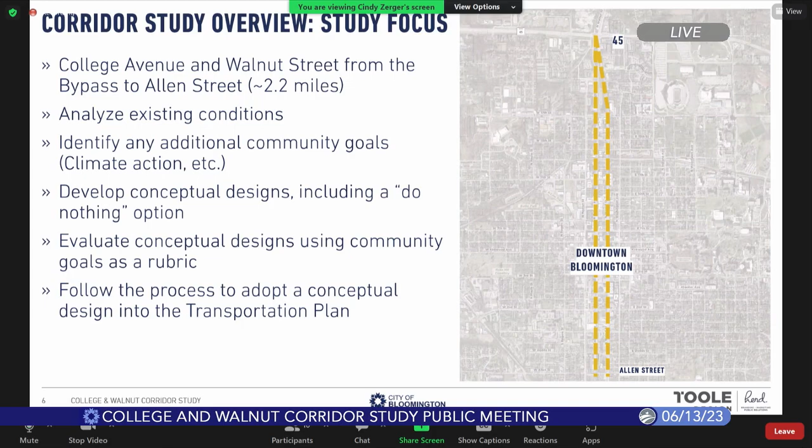So once that range of possibilities is developed, we move into evaluating the conceptual designs based on our community goals. Which of these design options helps us encourage downtown businesses the most? Which of these helps us improve pedestrian safety? Which of these helps us address some of the frustrations with deliveries and loading? That's how we want to evaluate them as a community. And then, let's say we do decide on one as a community, we want to move forward with a design and go through a formal adoption process to amend it into the transportation plan.

Okay. Even on the big screen, those are a little bit small.

I'll do a summary. In the transportation plan, it identified 6 goals of the corridor study: provide pedestrians with safe passage along the corridors, provide bicyclists with safe protected bicycle paths along the corridors, provide transit with safe and efficient ways to operate, accommodate potentially new forms of transportation, facilitate safe automobile traffic, and enhance the vitality of downtown. Those were the goals established in the transportation plan.

One thing we want to hear about tonight is whether there's something missing. Do we need to add to that?

Oh wait, and now Cindy will do a little bit of history. Okay, thank you.

Thanks, Beth. I'll try to talk a little slower. Hopefully this will be a little bit of entertainment, a little bit of education, and then we'll really dive into hearing from you.

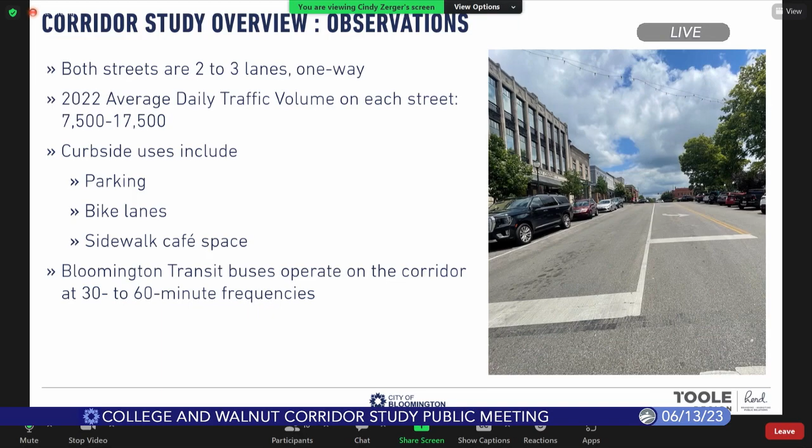Some of the things we wanted to mention in terms of our observations as we've been here—some qualitative, some quantitative. Both streets are 2 to 3 lane one-way configurations at this time. The average daily traffic volume varies between 7,500 to 17,500, depending on where you are in the corridor. Different curbside uses happen in different areas—parking is present in some areas, there are bike lanes in some space, sidewalks, and certainly cafe space as well. Bloomington Transit operates on the corridor at what we call 30 to 60-minute frequencies.

Let's talk a little bit about the volumes. This has come up today, even in conversation, so I want to mention it. The average daily traffic volume is 7,500 to 17,500 on the streets, based on 2022 numbers.

I want to share this graphic. It's hard to see, but what you need to focus on is the 1976 volumes indicated on the right. What you see highlighted in red is actually a decrease in volumes between 1976 and now. So we've seen a decrease in volumes, and in green you can see the increase—very marginal increases, less than 1%.

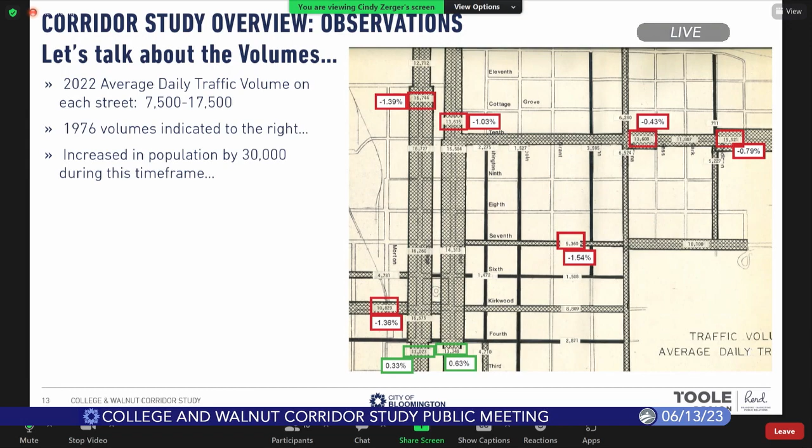So the corridor has actually decreased in volume, but interestingly, at the same time, your population in Bloomington has increased. So there's some interesting things going on there in terms of how people are navigating the city, maybe how they're getting around in different ways throughout the city. Just something really important to note and keep in mind.

Oftentimes, we say that people will tend to choose different modes if they have the right type of provision, or the right type of comfortable facility to be able to walk or bike. So you might see some shifts in this depending on the type of design treatment that we think about.

In terms of safety, on the left you'll see some data points I want to share, and on the right are some photos we took yesterday and our observations. About 150 crashes along the length of the project each year. That's a high number when we work in communities all across the country, and that's really high.

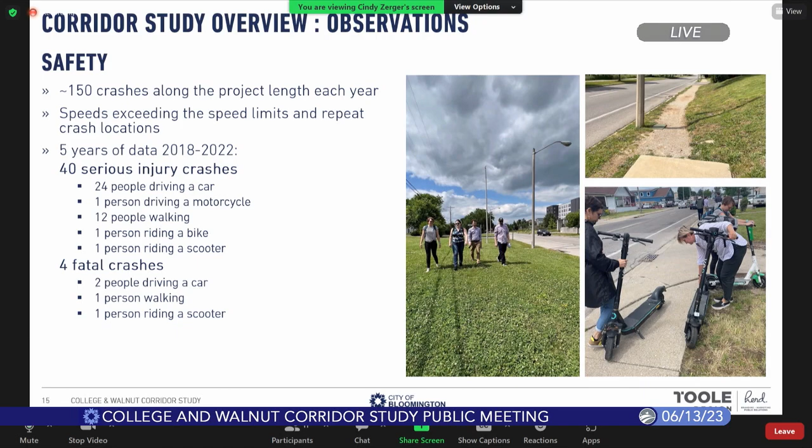In terms of crashes, in the last 5 years of data, there were 40 serious injury crashes, and that lists all the different types of crashes, and 4 were fatal. Again, high numbers that we really want to be thinking about when we think about street design and what can we do to make it safer for everyone.

Accessibility is about people, how can people navigate who might depend on walking as a mode they need to use. They don't have a car, they don't have a bike, but walking is their option. Also people who have to use mobility devices, so anyone with accessibility challenges to navigating. It's an inaccessible network in some areas.

You can see sidewalks don't have curb cuts in this instance going across a driveway. So getting from one side of the driveway to the other could be really hard for someone who's in a wheelchair. And it's an incomplete network in some places.

On the previous slide, you saw some of us walking along a grass area. Same here, a lack of presence of sidewalk in some areas that we want to think about in terms of a consistent facility. Other aspects of accessibility: how are people getting into businesses?

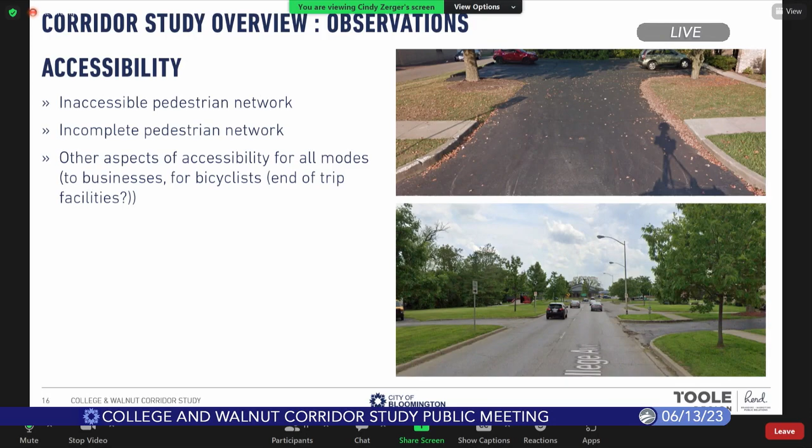Is that an accessible route? Are there other things we could do for people who want to access businesses but come by a different mode, say biking, creating what we call end-of-trip facilities or bike parking areas? Really important for people to feel like they can use the area.

In terms of your public spaces, you have some really fun things going on in the city of Bloomington, and certainly along the corridor we saw some great things. You also have some challenging areas.

As I mentioned before, sometimes a lack of sidewalks, narrow, it feels narrow, it's hard to walk in groups or with a person next to you. There are tripping hazards in some locations as well, so thinking about how we can freshen that up.

There are lots of opportunities we see to increase the economic vitality and better support adjacent land uses, advancing some goals that you have in your planning documents, embodying the identity of Bloomington. What do you want Bloomington to be known as when people arrive into your community? Think creatively about things we want to incorporate into the streets, either more permanently or flexibly.

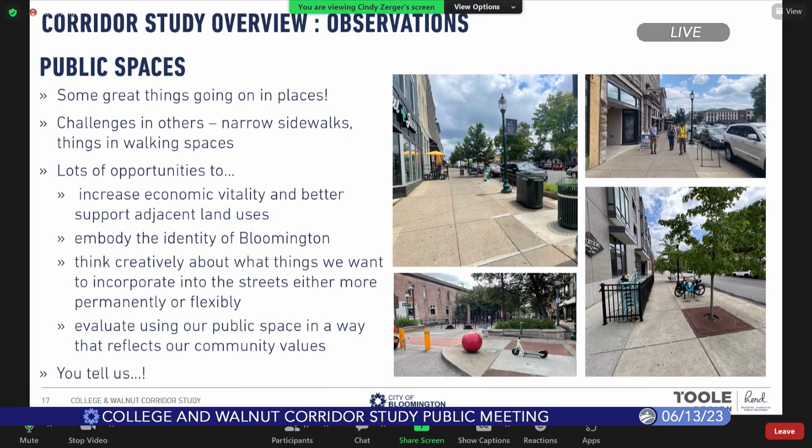You have some parklet things going on in different areas. Should those be thought of as more temporary or more permanent solutions? This is a great opportunity in terms of this study to really evaluate the use of public space in a way that reflects your community values. We're going to ask you a lot about that tonight, and of course you'll tell us how it works, how you observe your public space.

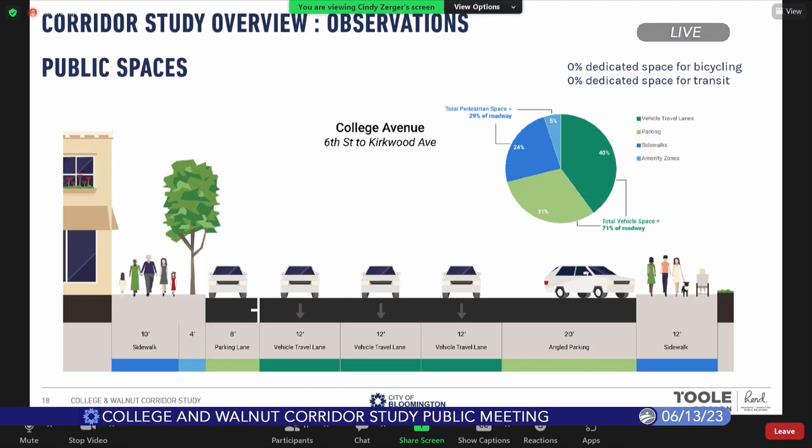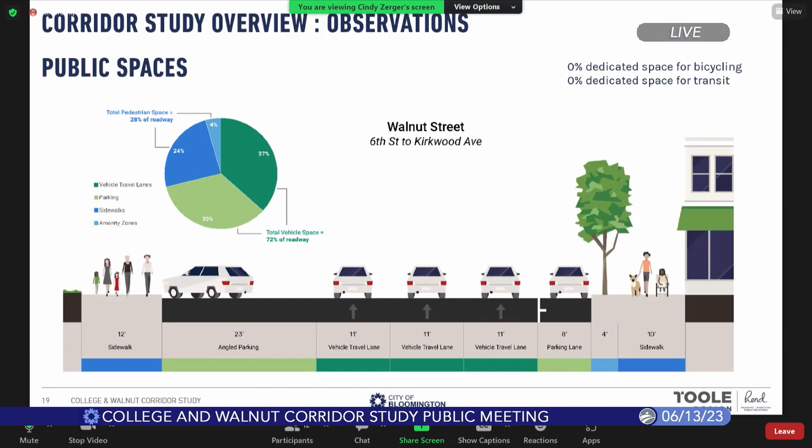On Walnut street, very similar in terms of its percentages. Again, 0 dedicated to cycling and transit, about 72% of the roadway dedicated to motor vehicles and 28% to pedestrian space. So that just gives you a sense of existing conditions.

We did a whole existing conditions report, and I didn't want to go into too much detail because we want to really hear from you. But I'm going to share with you a little bit of what we call food for thought, some things to think about before we dive into community conversations.

Our streets originally had a traditional conception that they were balanced. What I want to call out here is whether it's a local street, which is something you use to access your residence, a collector, another designation, or arterial streets within the roadway classification. Generally, it was balanced between access, which is about accessing your destinations, and throughput, which is about moving through the space.

So it was a very balanced way across all of our streets. The conventional conception, and when I say conventional, I mean when the automobile became more of the central way of navigating our cities, it changed. It really changed. We saw much more throughput happening on our arterials, then our collectors, and then of course local streets. This was really a shift in our mentality, and it's created the system we have right now, which is pretty motor vehicle focused in a lot of communities.

If you just do the squint test, I'm not going to dwell too much on this, but you can kind of see where your arterials are. These are just some X-rays, or aerial views of different communities throughout the U.S., showing some examples of where the arterials are.

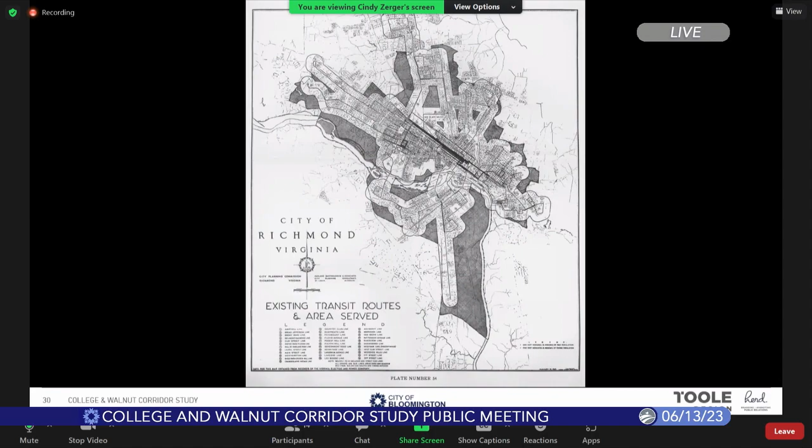That same place, Richmond, Virginia, also had a really fantastic transit system in their downtown area. In 1949, they said goodbye to their transit system. In 2018, they replaced their transit system—this is their BRT. So they're going back through a rethinking of their streets and what they need to function.

Another community we worked with asked us to come in and look at their downtown street system. This was a community with a whole one-way system downtown, and we convened community conversations, and people felt different sentiment about whether the streets should become two-way or stay one-way.

We convened conversations, really listened to the community, came up with different options, and this was our overall plan. I won't get into too much detail, but you can see we thought about all the streets as a system. When you think about returning one-way to two-way, you need to think about the implications of that street restoration.

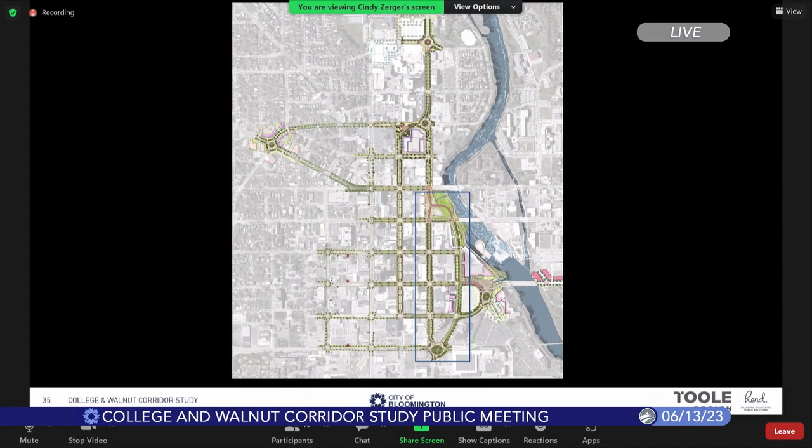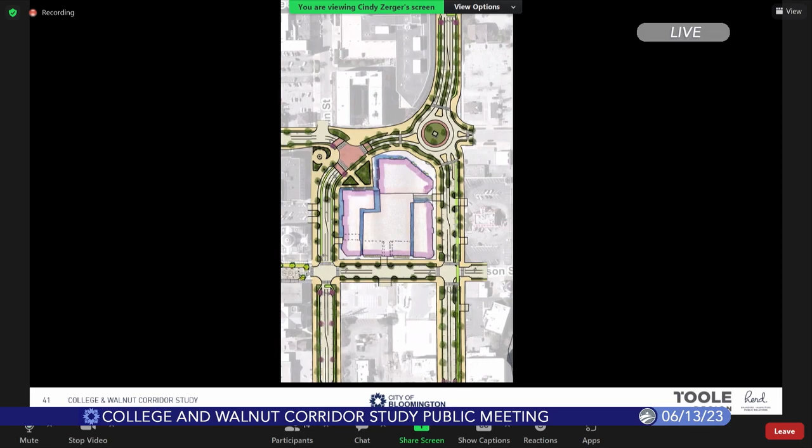This is one of the intersections we looked at and came up with a design solution for—not too different from what you have at the south end, where Walnut and College come together. We came up with a concept for a roundabout configuration, so we could do the two-way restoration, and that's what they built. It's been very successful for that community.

Anyone know where that was?

That's right. I'm going to talk a little bit now about some things, just food for thought—ideas to get the juices flowing as we jump into conversations with you.

The purpose of our cities originally was to advance efficient and effective exchange. Efficient meaning minimal use of resources—land, energy, and time. Transportation was meant to minimize long-distance travel; we wanted people to access destinations quickly and easily. The land use purpose was to concentrate the components of civic life—it was all about social and economic exchange. That's why we have cities.

That's the foundation, and we've created a conventional approach to a lot of our street systems. Many communities are going through what you are right now and studying whether to keep that conventional focus, or if there are different options we could be thinking about. So how do you turn conventionally designed spaces into great places?

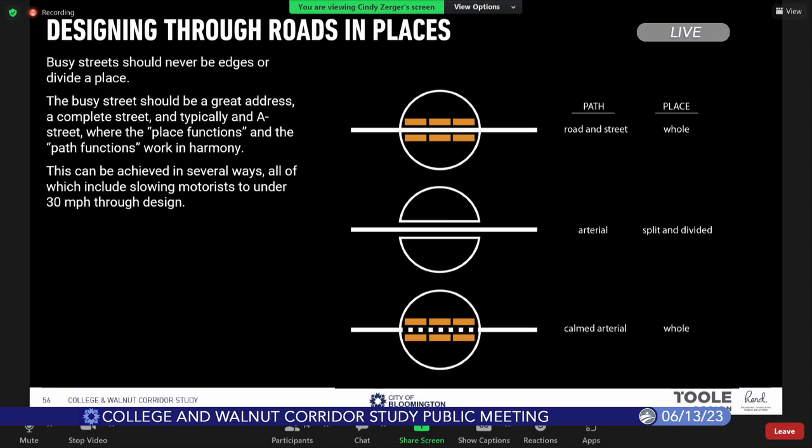It's hard for that to feel like a comfortable whole of a place. Now a lot of communities are doing exactly what you're thinking about: how do we calm that arterial? How do we make it back into a whole?

There are different opportunities. We call this spreading car loads, thinking about where the cars are in your downtown area. A couple different ways we can think about this.

You can also think about splitting those loads, and you have the room on both College and Walnut to remove lanes, if you wanted to do that—that's definitely on the table. What you have is 17,500 as your max average daily traffic, and you can certainly do one-lane configurations there.

Consider all users of the streets. Certainly vehicles are still an important part of that, as are people who want to walk, bike, or rely on non-motorized transportation as their primary use of the street. These are what we call mobile—people who are mobile.

There are other uses of the street that happen too—accessing schools, accessing residences, and different play and gathering spaces. Those are more static spaces.

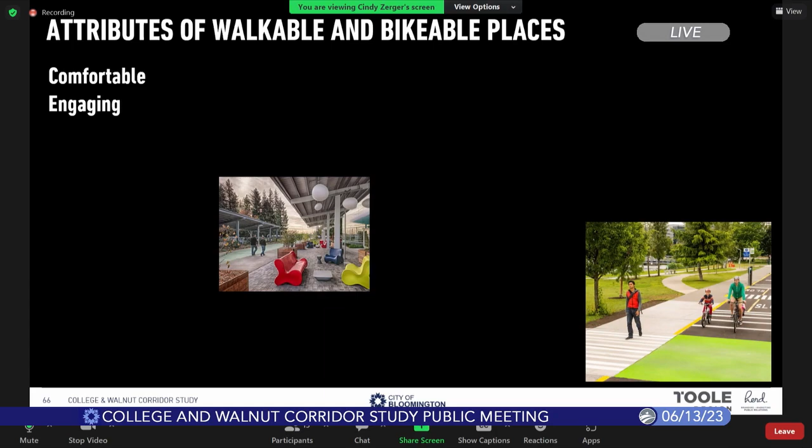That they're accessible—meaning they allow anyone with any sort of mobility impairment to navigate the streets. That they feel connected—that they're truly connected through their path system, or the sidewalk network is very connected.

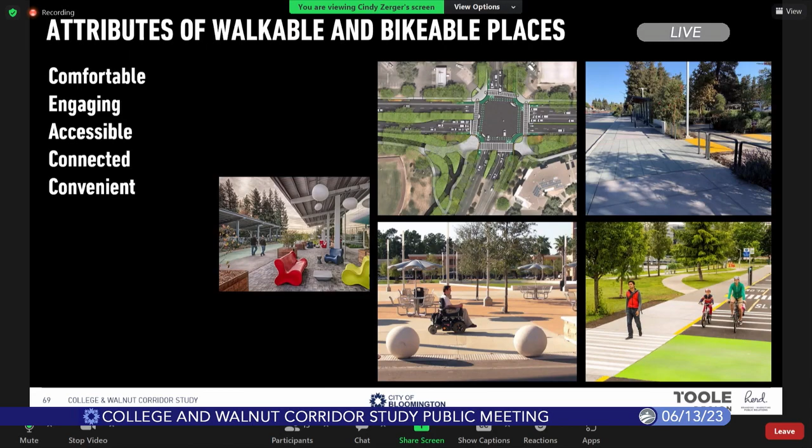That they're convenient—that they access the destinations you want to access, be that places of destination or even your transit system. That they feel legible—very intuitive to navigate, no matter what mode you're using along your streets.

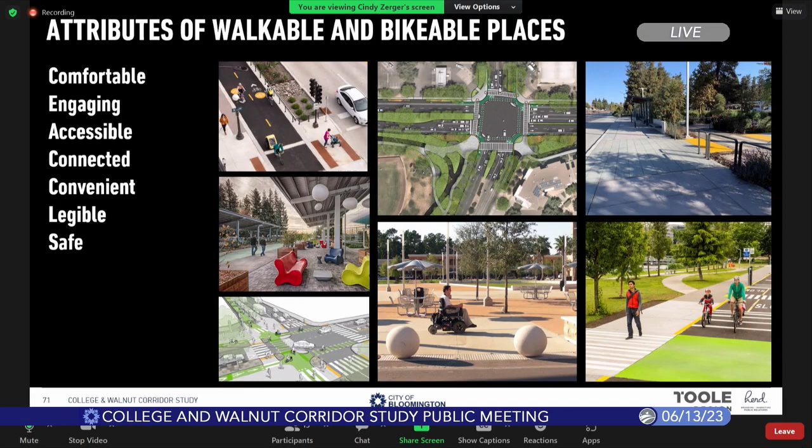And lastly, but most importantly, that they're safe—that there are provisions for all the modes that want to be on your streets, so we think about them in terms of safety.

One way to think about our streets—we've talked a lot about vehicle capacity, but we've shifted to more of a person capacity analysis. This allows us to really look at and consider a broader range of modes and users of an urban street.

The last thing I want to leave with you before we go into conversation is this idea of path as place—that a path, a roadway, a street, a network of our streets, even a highway, can be designed through its composition to be part of a place, a defined location.

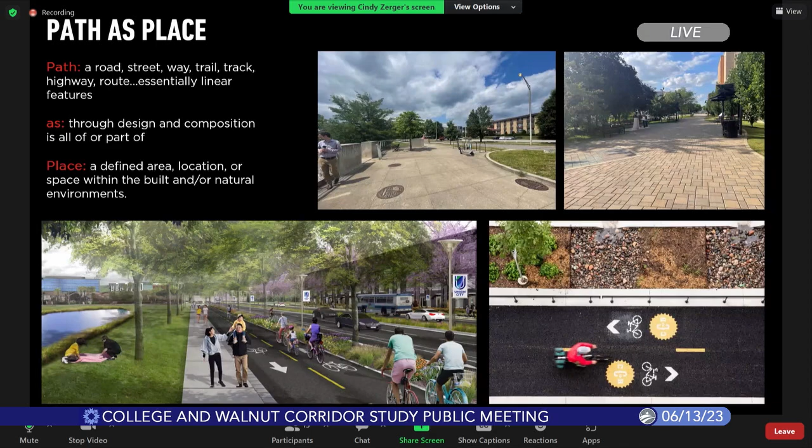It can become the identity for different communities. And it's not about making everything be place-oriented, but through our design treatments, how do you keep that space as memorable? How do you make it as memorable as the destinations to which they lead? So it's a path as place approach that we think will really be something to think about, even if it's still a very one-way situation on your streets. We want to be thinking about how it functions as a place as well. And it's applicable to every context, from an urban core to a natural environment.

Path as place is sort of an approach to street design. So now it's really time to hear from you. That was a lot, but hopefully some thoughts, some ideas to help you think about new ways of conceiving of the streets.

We're going to ask you 3 questions. We're going to ask you to come up to different tables. We'll ask you to kind of put yourself at different tables. We're not going to number off or anything, you just go to a different table. There are 5 different options here, you can see them. We have a map on each table. We'll turn that over and ask for you to provide feedback.

And we're going to ask 3 questions. You can ask us questions too, of course, the conversation is really free-flowing. But these are the 3 questions: What do you like and want to see retained? What do you dislike and want to see changed? And what's missing that you would like to see created? We really want you to focus on what are the outcomes you want to achieve here, what are the things you really want these streets to do for your community.

Hearing from you is really important at this time. We'll go through a little report out after. I'm going to leave these questions up there, and we're going to ask you to convene at these tables. Jazz, Melissa, and I will be filtering around to the different tables. We're not going to sit at each table, so you can have a conversation, but we're there to answer questions. Then we're going to ask each of your tables to report out, so think about who from your table is going to report out on your behalf. It's 6:40, we have about 30 minutes for this, a little bit more, and we'll convene and do a report out for about 10 minutes toward the end. We'll give you a little warning in terms of the time, and then we'll talk about some next steps.